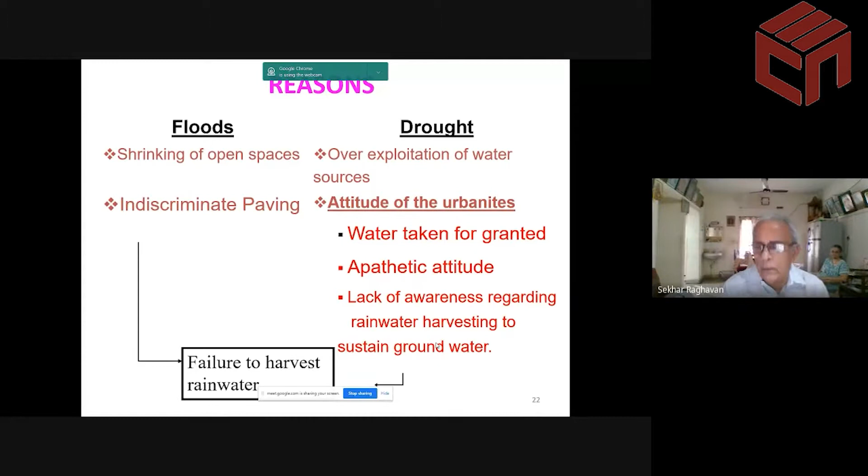The only answer to both problems is rainwater harvesting. Rainwater harvesting is being talked about so much more now than ever before.

Let us see how water was managed 200 years back. Kings and rulers created water bodies and harvested rain in them. This was true in every town or every city - you would have traditional water bodies. And there were even community wells on the road where people could go and fetch water for their daily needs.

But people did not bother to harvest rain because it was done by the kings and rulers. So what happened in the last 100 years? He started buying a plot of land, constructing a house, and then dug an open well or a bore well to extract groundwater. Therefore, the responsibility now shifts from the kings and rulers to the individuals. They will have to sustain their groundwater source, otherwise their bore wells and wells will go dry.

It has gone to the builders now, because nobody buys a plot of land and constructs a house these days. What do we do? We go to a builder and book an apartment, a 2 BHK or a 3 BHK. Therefore, it's the builder who buys the plot of land, constructs the high-rise building, closes the open well which exists, then goes in for a bore well and gives you saline water. Therefore, the responsibility of implementing harvesting now lies only with the builder. The individuals cannot play any important role.

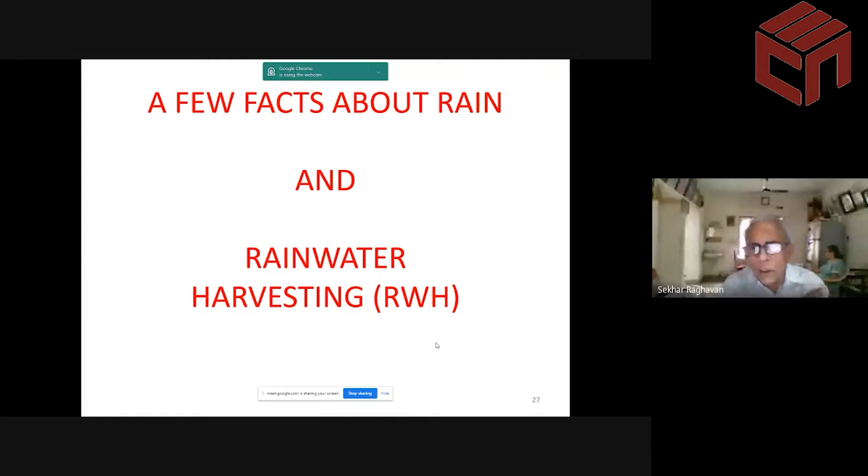A few facts about rain and rainwater harvesting. If you look at water on earth, you find it in oceans, which is saline, and on land, which is supposed to be fresh water. This essentially comes either from melting of ice or from precipitation, which is rainfall. There's no other way the earth gets water. Therefore, these are called primary sources of fresh water. This is what you find in rivers, in lakes and ponds, and as groundwater. People think they are all different, which is just not true. Therefore, rivers, lakes, and ponds are called secondary sources of fresh water.

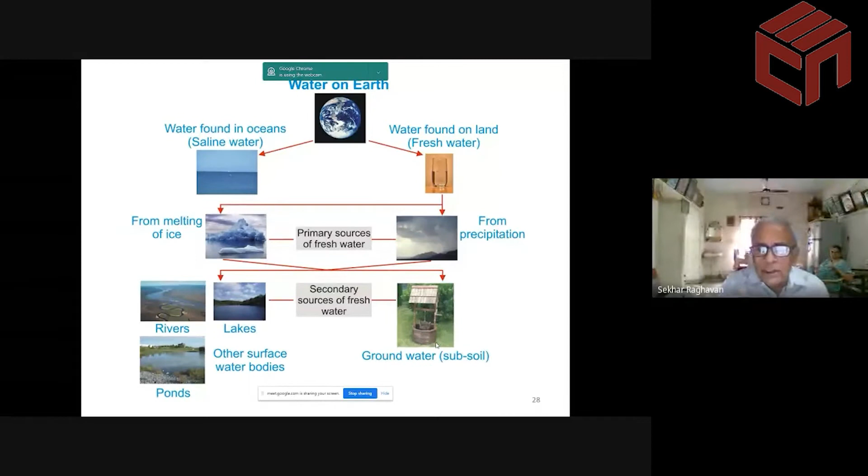Another important reason why harvesting is not becoming popular is that municipal water is not metered, at least in Chennai - I do not know about other towns. So you get plenty of municipal water, and therefore people are not inclined to harvest rain. Only if the municipal water is metered and the tariff is high will people tend towards harvesting rainwater. This is another major problem why harvesting is not becoming popular.

As I told you, rainwater harvesting is not an option, though people are under the impression that it is. If you have a bore well or an open well in your house, you will have to harvest rain to sustain the groundwater source. Indians were the world leaders in rainwater harvesting. There are evidences to show that people had harvested rain as early as 3000 BC, which is 5000 years back, and our ancestors had understood it very clearly.

Every part of India had its traditional water harvesting systems. These have been beautifully documented in a book called Dying Wisdom, published by the Center for Science and Environment, New Delhi. In Tamil, it is called the Ery. You find them in Andhra Pradesh, where they are called Cheruvu, and in Karnataka, called Kere. They are identical - all three are identical. There are 150,000 such water bodies in the three states put together, and most of them are interconnected.

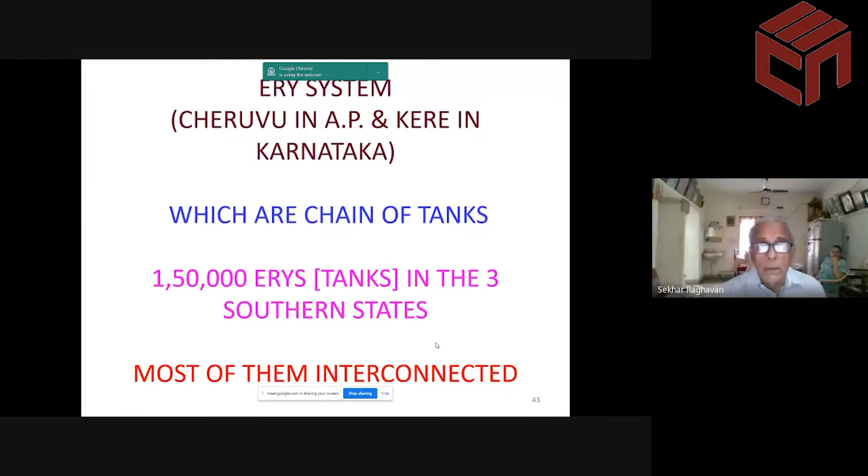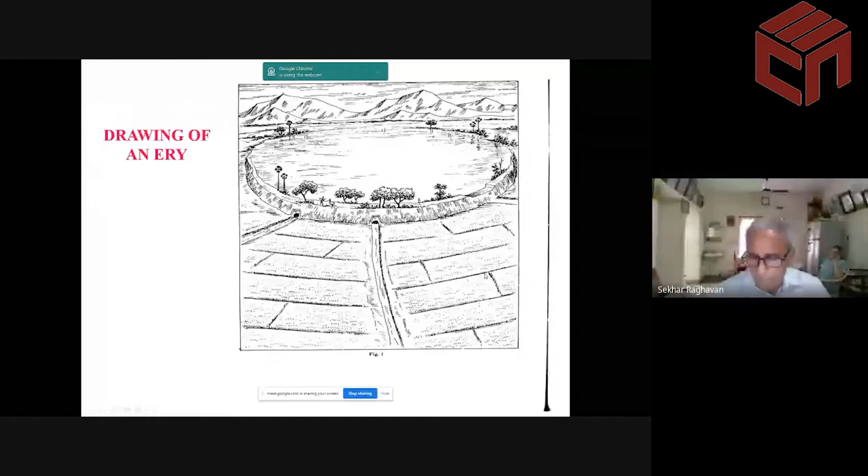Even among these water bodies, there are two kinds. One is called system tanks, where water flowing in the river is diverted into water bodies on both sides. Otherwise, a lot of water would get wasted falling into the sea. So that is conserved in these water bodies, and there is really no need for interlinking rivers so far as these system tanks are kept in good shape, because there is absolutely no wastage falling into the sea.

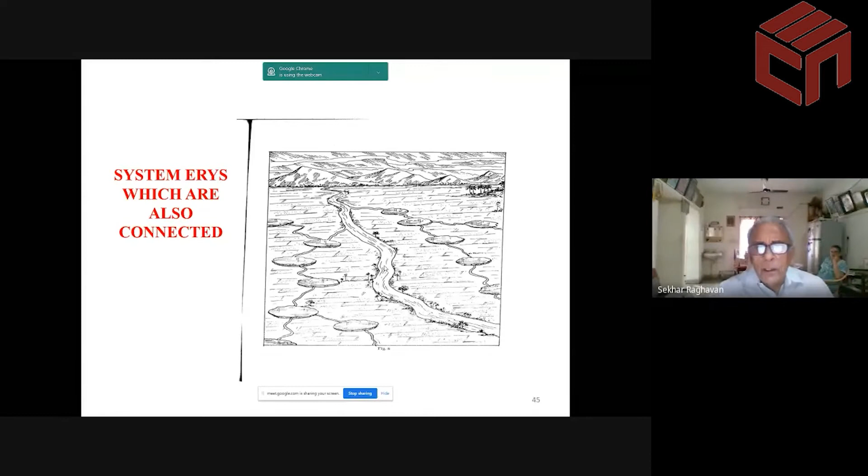What is the need for harvesting? Why should I harvest rain? Rain is the predominant source of fresh water on earth, and cities are not rain starved. We get enough rain. For example, Chennai's average annual rainfall is something like 1.3 meters, which is more than the country's average.

Therefore, we should not suffer for water if only we know how to harvest it. Another important point is it rains only for a few days in a year. These are called rainy days, and they are documented by the Indian Meteorological Department. For any city, you can find out the average rainfall and the rainy days in that town. In coastal cities like Chennai, what is not harvested runs off to the sea and gets wasted.

The entire thing about harvesting, there are only two things you can do with rainwater. One is you can collect it, either in a water body like the irrigation tank, or in a plastic tank or masonry tank in cities for immediate use, or put it into the soil, which is called recharge, to sustain your groundwater source. These are the only two things you can do with rainwater. You choose the appropriate one depending on which is more relevant.

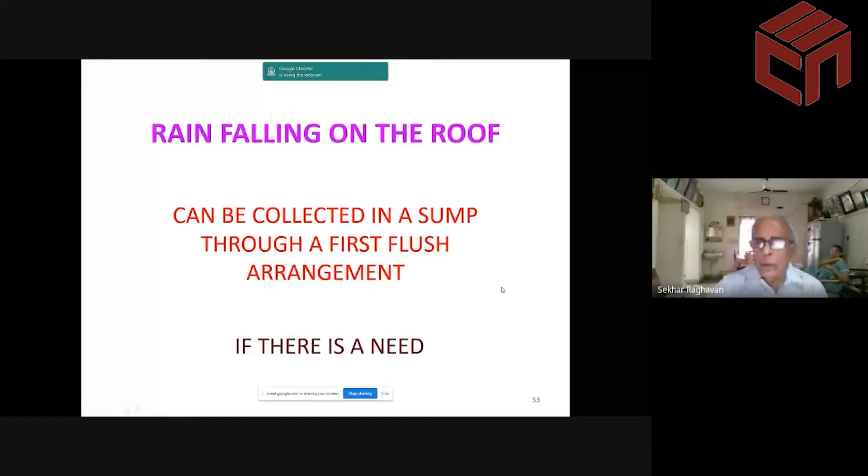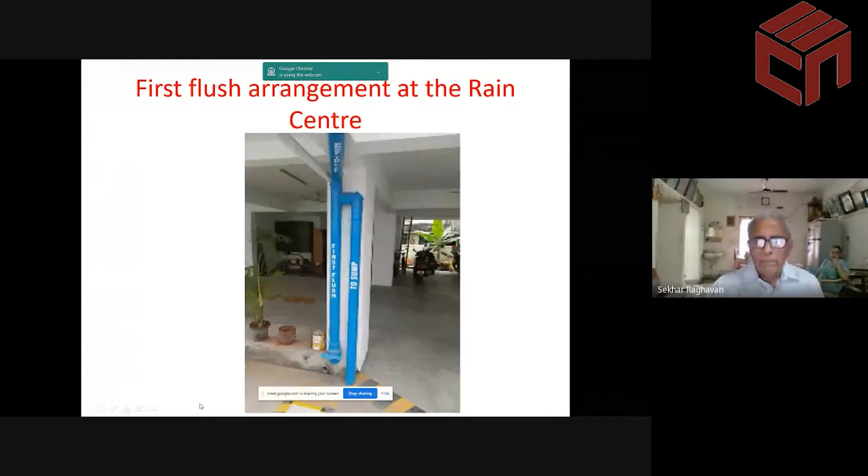Or if you don't want to collect rainwater in a sump, put it into the soil for sustaining the groundwater source through properly designed recharge wells.

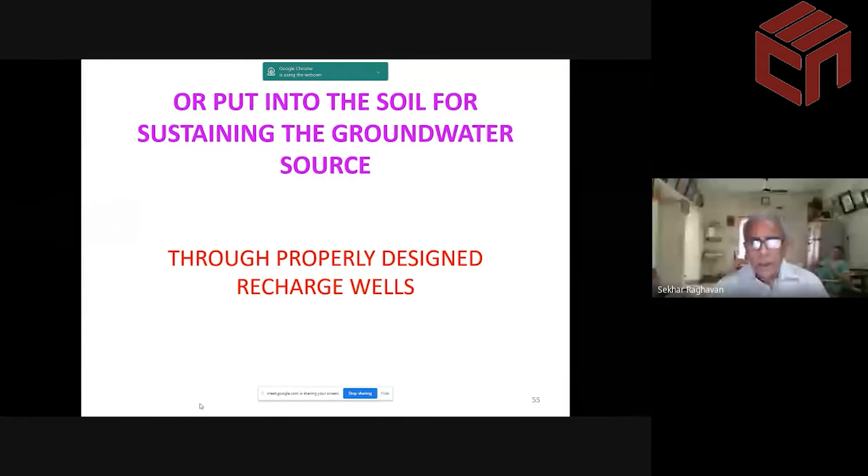What is a recharge well? This is a recharge well. These are made out of cement rings. Each one is a ring, and these rings are readily available in the market. The diameter of these rings vary from 2.5 to 6 feet, and the depth of these wells is 15 feet. They are left empty - you should not try to fill it up with anything.

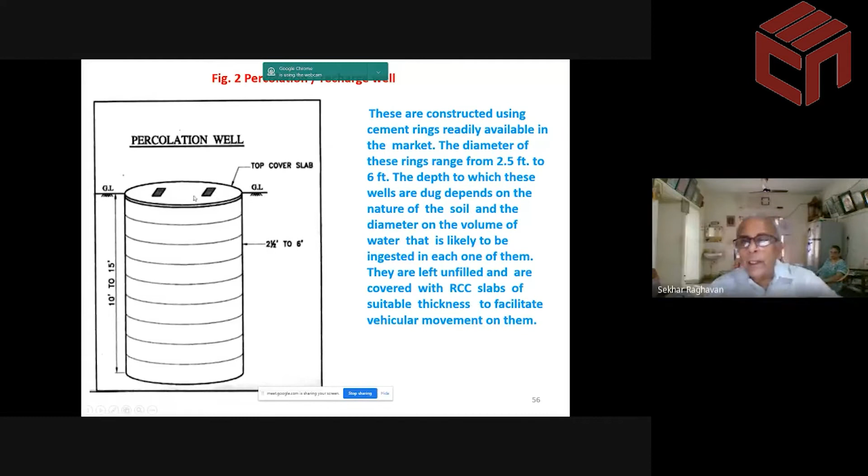You put a thick cover on top so that even vehicles can go on top. This is called a recharge well or a percolation pit. And this is a wrong method for harvesting rain.

Instead of a recharge well, what they do is put a slotted PVC pipe inside and try to harvest rain. The problem is the amount of water that can get into the pipe is much less than the recharge well. Secondly, once this gets clogged, you cannot clean it, so these structures work for a year or two and then stop working. Whereas with my recharge well, a person can get in, de-silt the well, come out, and maintain it for years. Some of the recharge wells we have made are 15 to 20 years old.

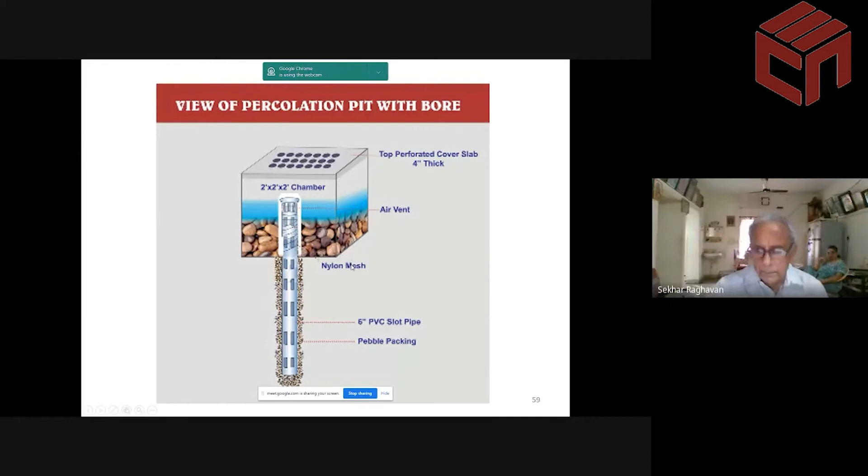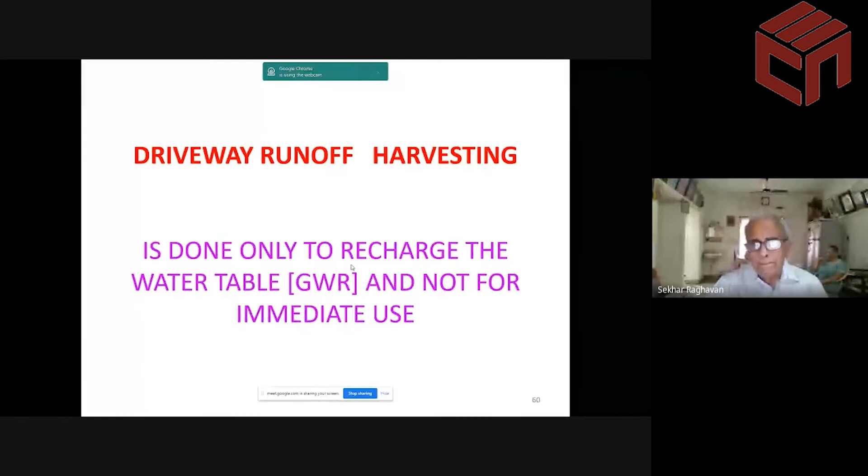Now, what do you do with the rain falling all around your house? This is called the driveway. It invariably goes to the street through the gate, runs off to the street, and can be intercepted at the gate by a gutter arrangement and injected into a recharge well.

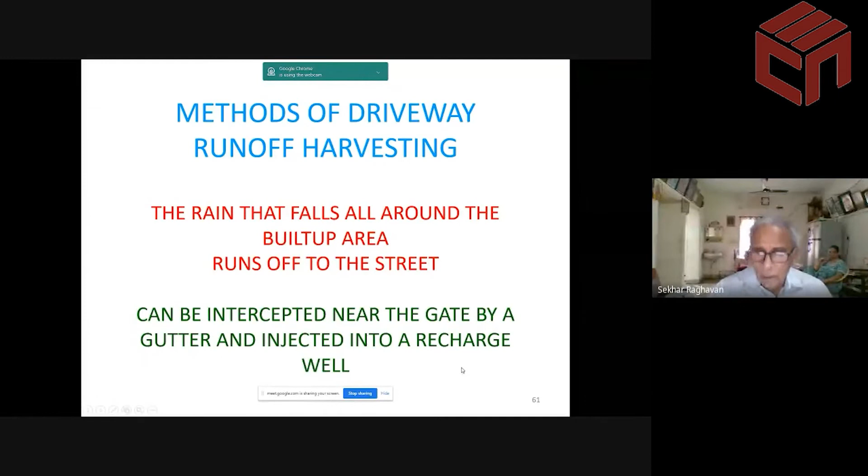So what is a gutter? This is a gutter, for example these holes, spanning the entire width of the gate, so that the rain falling here flows in this direction and falls into the gutter through these holes. Then I have a recharge well here at the back. This driveway runoff is put into the recharge well for groundwater recharge. You should not collect the driveway runoff in a sump because it will be dirty—it's only fit for recharge.

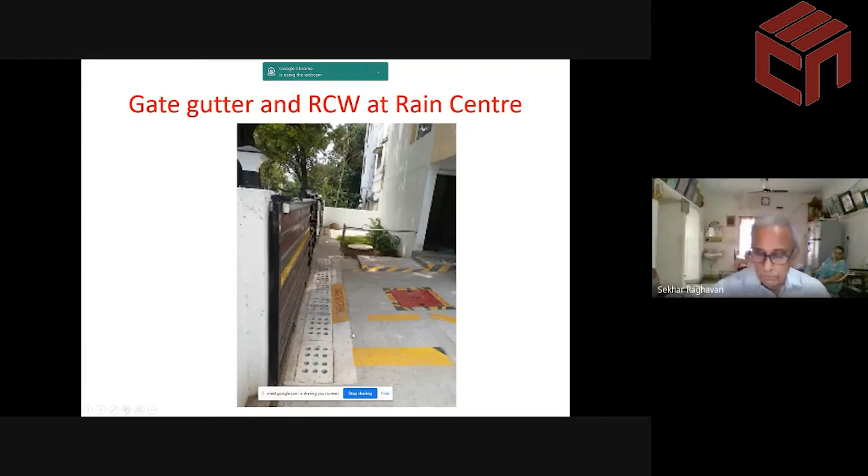These are thick lids, RCC lids, so vehicles can go on top. This is how it will look. It will have to be cleaned periodically—you just remove the lid and clean the gutter once a year or so.

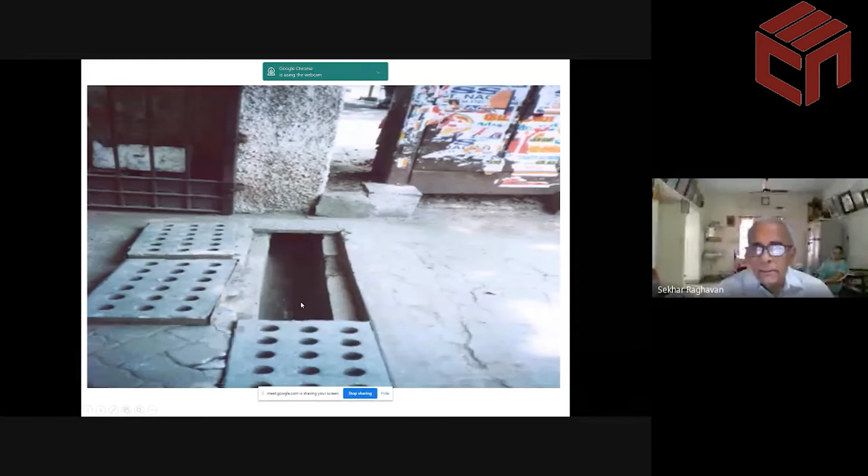What is the role of the state? I've told you about society's role. In the past, our Honorable Chief Minister, Jayalalitha, was so passionate about water and rainwater harvesting that Tamil Nadu and Chennai became role models for the entire country. Both Sri Lanka and Delhi wanted to replicate our model, so we were invited to advise them and set up rain centers in both Colombo and New Delhi.

Tamil Nadu was the first state in the country to make rainwater harvesting compulsory in all buildings, old and new. This law came into effect in October 2002, with a deadline of August 2003. So what happened after that?

2003 was the deadline, as I told you. 2003 and 2004 monsoons were bad for Chennai, so we could not really establish the success. Whereas 2005 saw record rainfall—instead of the average of 1.3, in 2005 it was 2.5.

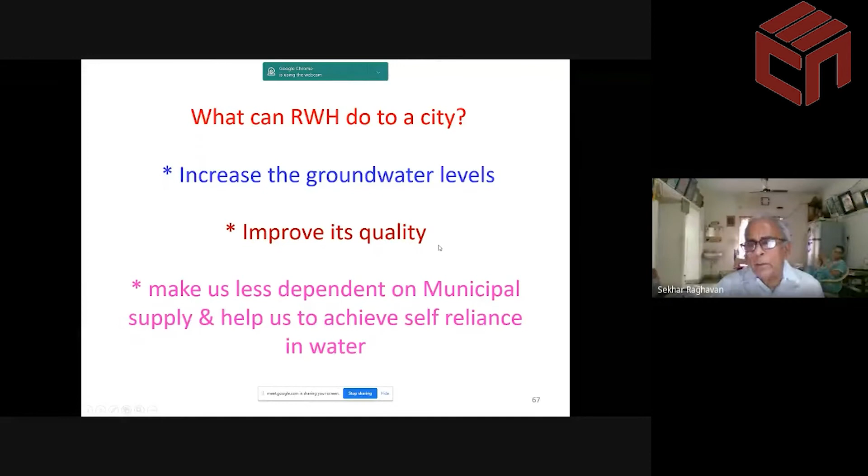This happened in Chennai. In January 2006, we did a survey and found that groundwater levels had gone up by 6 meters—a phenomenal rise. Quality also improved, obviously, because rainwater being pure dilutes the excess salts in groundwater and improves its quality.

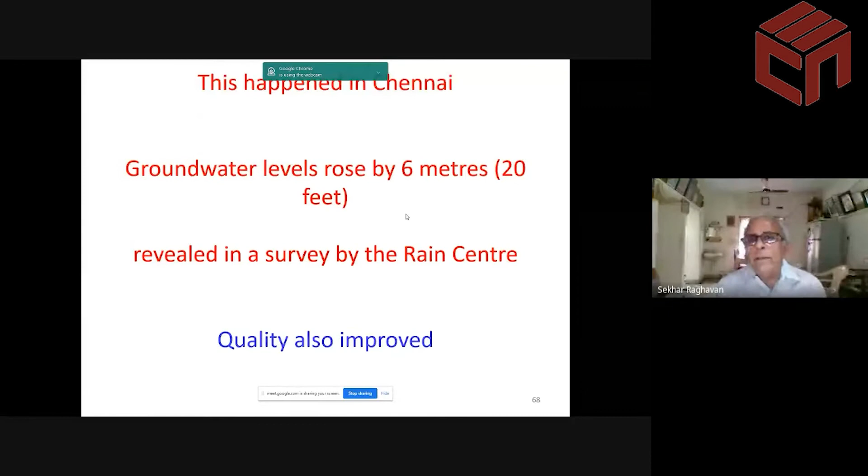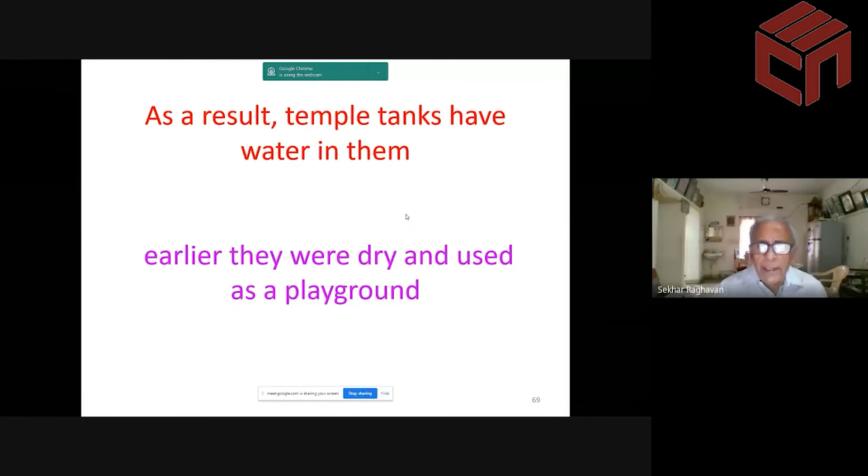Another proof came from temple tanks. We have about 39 temple tanks in Chennai city—every big temple has a tank, similar to the step wells of North India. Earlier they were dry and used as a playground. You can see this temple tank in a place called Mylapore, with children playing cricket—it was so dry.

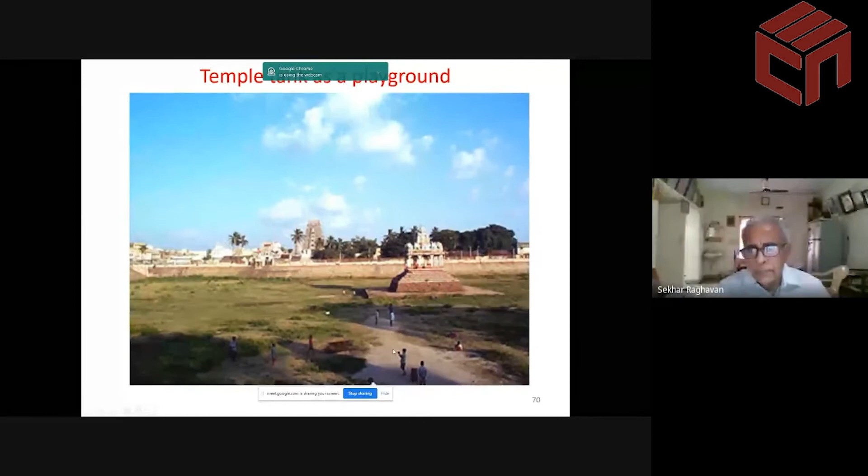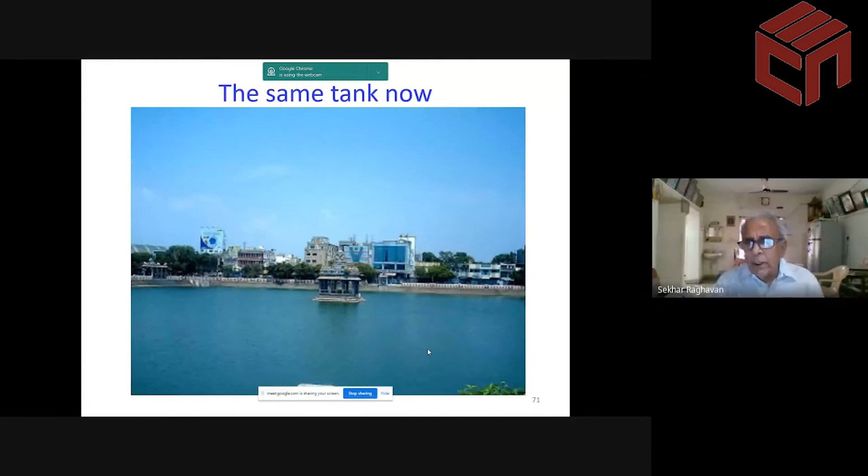Whereas after January 2006, the same temple tank looks like this. This can happen only if the groundwater levels rise—you cannot fill up a temple tank from outside. So this is similar to an open well at home.

The role of the state in future—I'll mention a few things. Right now, the rain falling on roads, what we call urban runoff, is collected by stormwater drains constructed by the Greater Chennai Corporation, and this is dumped into the Bay of Bengal. All these stormwater drains dump rainwater into the sea.

So we have been telling the corporation that they should make sincere attempts to harvest the rain that is falling on the roads also, by constructing recharge wells on the road.

Number two, they should recover the water bodies in the extended area of Chennai. Chennai used to be 174 square kilometers earlier. Now it has expanded, it's now 426 square kilometers, and there are a lot of water bodies. If you drive through Pallavaram Road, where you have Kamakshi Hospital and all that, Thoraipakkam Pallavaram Road, you will see water bodies on both sides. They are called Narayanapuram, Nanmangalam, Kovilambakkam, and so on.

These water bodies are being abused now. People are dumping garbage into it, they are letting out waste water into it. So the government should immediately stop all that, recover all these water bodies, and make them good recharge ponds or reservoirs.

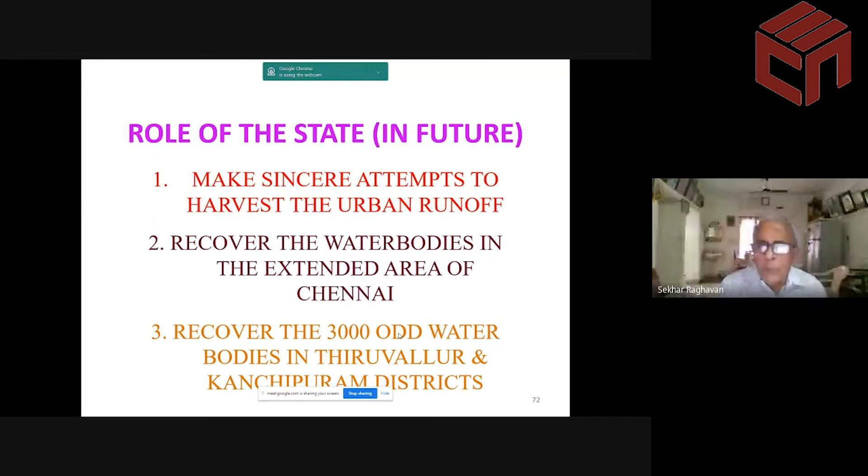In addition, the third point is there are still a lot of water bodies in the neighboring districts of Thiruvallur, Kanchipuram, and also Chengalpet. They have lost their agricultural relevance, most of them. They can be revived, all the encroachments can be removed, the bunds can be strengthened, and a lot of rainwater can be collected. Once this is done, Chennai will never face any water crisis in future. There's no need for going in for desalination plants and so on.

Sink recharge wells on the roads. This is a recharge well in Besantnagar where I'm living. This is on the road. So any stagnant water on the road will get into these recharge wells.

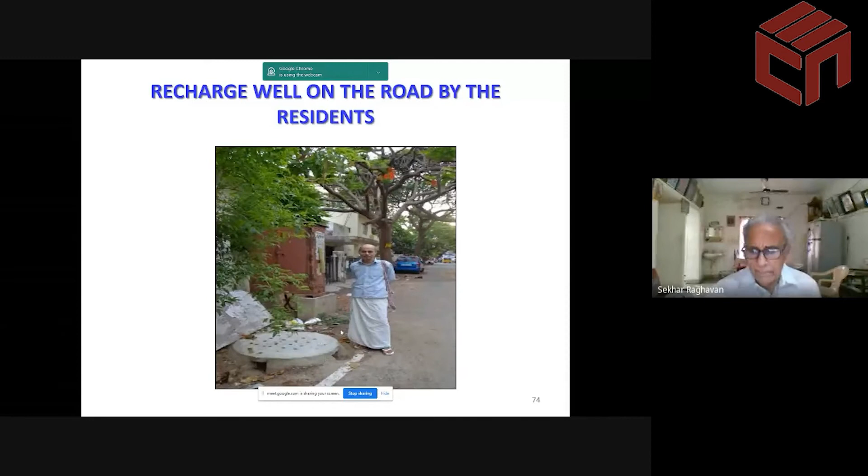Another recharge well is being dug on the road once again in Besantnagar, of course with the permission of the corporation. You cannot do it without their permission.

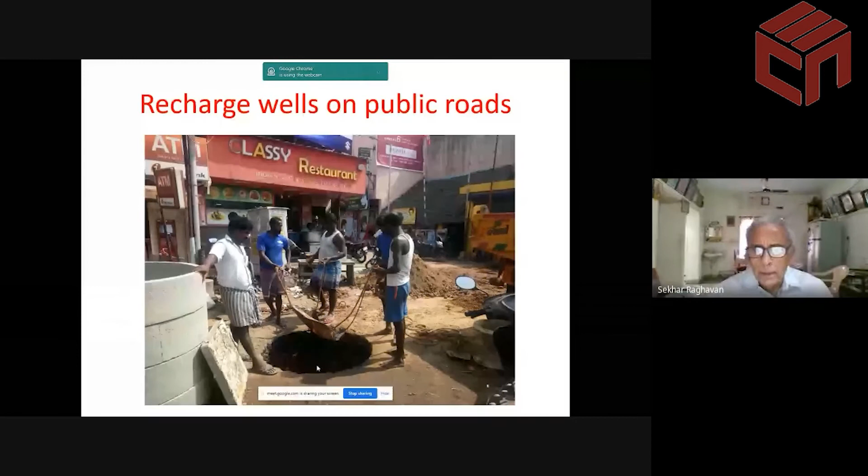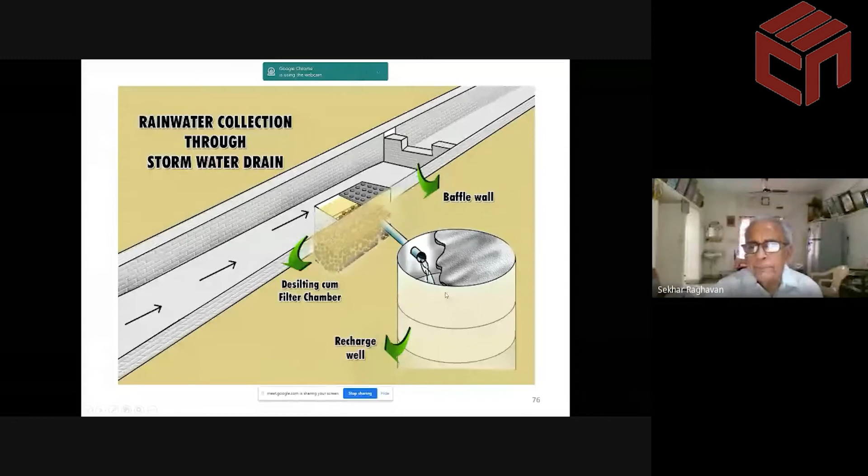The recharge well is being dug. This is the drain, this is a stormwater drain. We have dug a recharge well right inside the drain.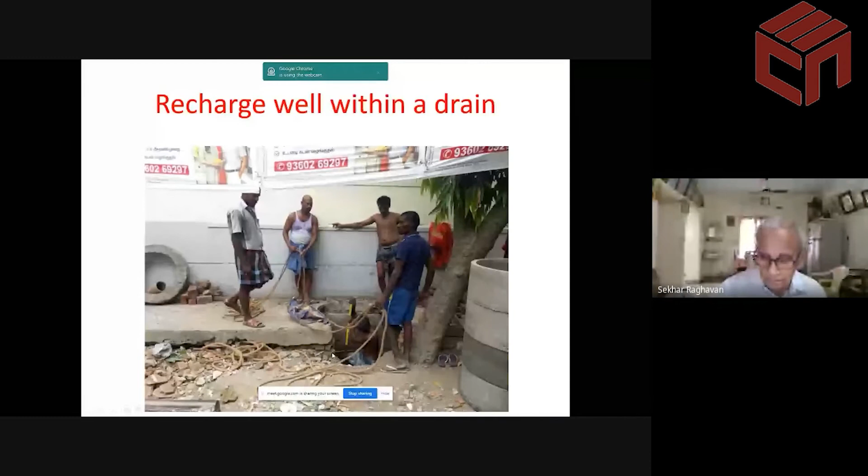The concluding remarks. I would like to tell you something about the importance of open wells.

We are closing down all these open wells, which is not good. I will tell you why.

So the open wells were tapping the shallow layer. Our grandfathers used to tap it by digging open wells. We have started closing all of them, particularly the builders, and then they started drilling bore wells. These bore wells invariably tap the deep layer, which is not a sustainable source, because any amount of harvesting that you do will not percolate beyond this point. This is hard rock. What will happen is this will get filled up.

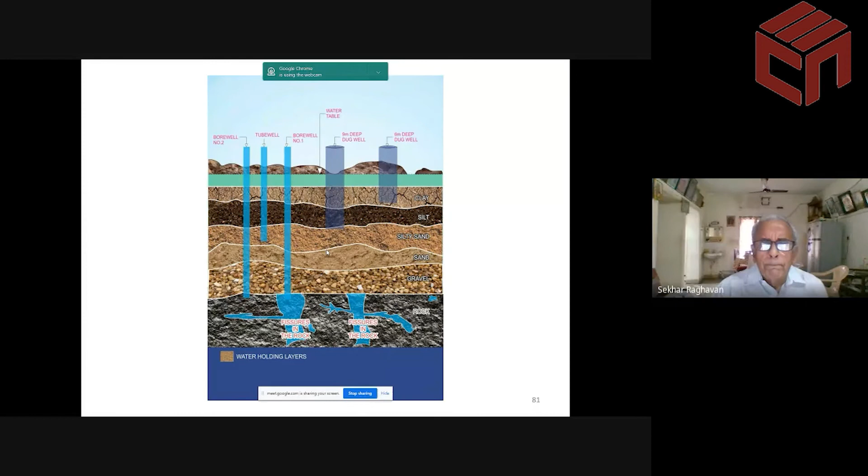Water from the shallow source during monsoon. I'm not against bore wells, please understand, but we should not ignore open wells. We have both, so we call them conjunctive use of aquifers. Use the shallow layer during monsoon and the deep layer during summer months.

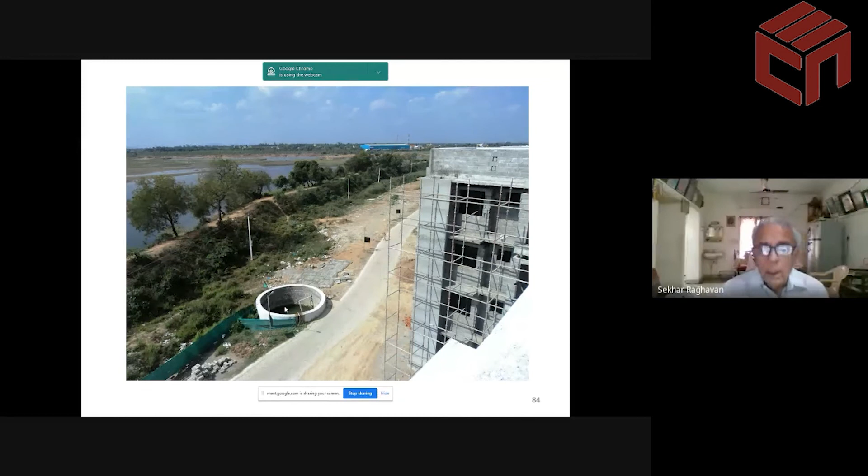This also we have been advising the government to sort of mandate. I'll just show you two case studies. One in MRC Nagar, just close to the beach, 108 apartments. They had bore wells giving saline water. We went and advised them to go in for open wells, which are just 20 feet deep.

And it started yielding very good water. They have even stopped buying tanker water or outsourcing water. Another complex in Virugambakkam, 384 apartments, had bore wells with excess iron. We dug an open well which is 19 feet deep, which gave water free of iron. And they have now got about 4 or 5 open wells within their complex.

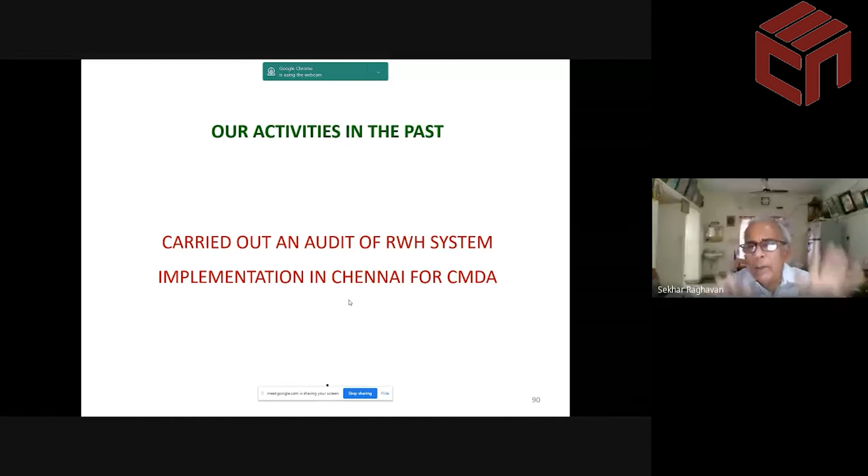We did an audit of rainwater harvesting implementation in Chennai for CMDA. Over 2 years we did this audit and came out with fresh suggestions and recommendations, and we completely changed all their old drawings. We said only a recharge well is a good structure. This is the first page of our report submitted to the

CMDA. Two corporates are helping us. What we do is implement harvesting in charitable institutions like old age homes, orphanages, colleges, schools, and so on, which is funded by the corporates through their CSR funds. We have done about 40 projects in the last 5 years.

But till now, the slogan has been making water everybody's business. From now on, the slogan will have to be extended: making not only water, but also rainwater harvesting everybody's business. No more lip service to water and rainwater harvesting. Water and rain will have to be understood beyond words. Water management should no longer be just a bureaucratic exercise, nor an academic exercise. It should be a people's movement. Love water and rain the way we love our children.

Yeah, it is true, every state will have to mandate rainwater harvesting, but that has been one of our suggestions. Our Rain Center works closely with the Department of Jal Shakti, Government of India. In a couple of presentations I made for them, I told them that every state should be asked to mandate rainwater harvesting. So what is happening is only some of them have done it so far, and even that too only for new buildings, new constructions. Only Tamil Nadu has done it for both old buildings and new buildings.